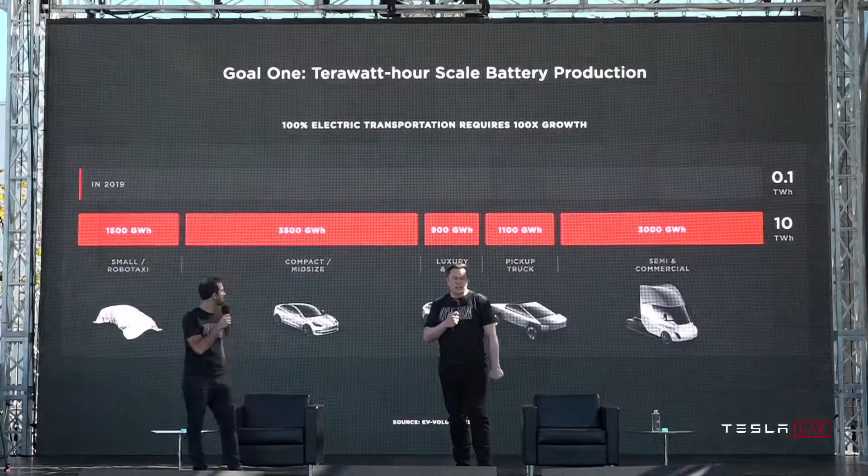Goal number one is terawatt-hour scale battery production. Tera is the new giga, and a terawatt is 1,000 times more than a gigawatt. So we used to talk in terms of gigawatts. In the future, we'll be talking in terms of terawatt hours. This is what's needed in order to transition the world to sustainability.

We're talking about 100x growth in batteries for electric vehicles to achieve this mission. And we are going to get there. It's just a matter of how fast, and our intention is to accelerate it.

You basically need on the order of roughly 10 terawatt hours a year of battery production to transition the global fleet of vehicles to electric. And the average vehicle lasts 15 years, so we're talking about 150 terawatt hours, give or take, to transition all vehicles of all types to electric. So it's a lot of batteries, basically.

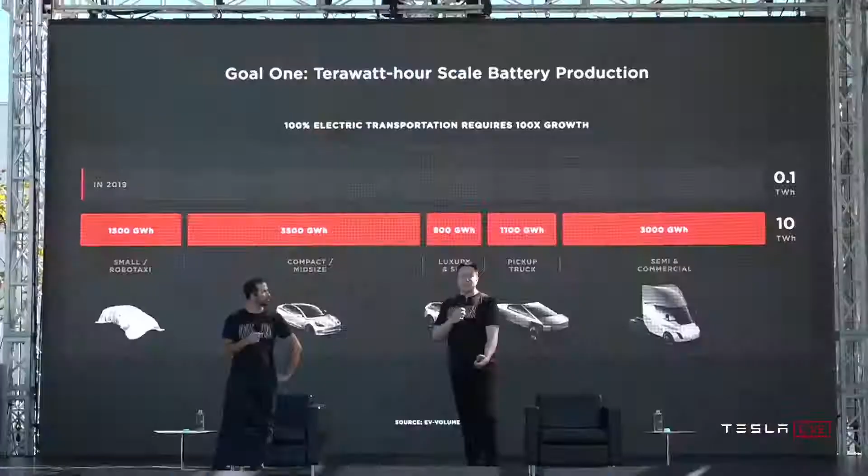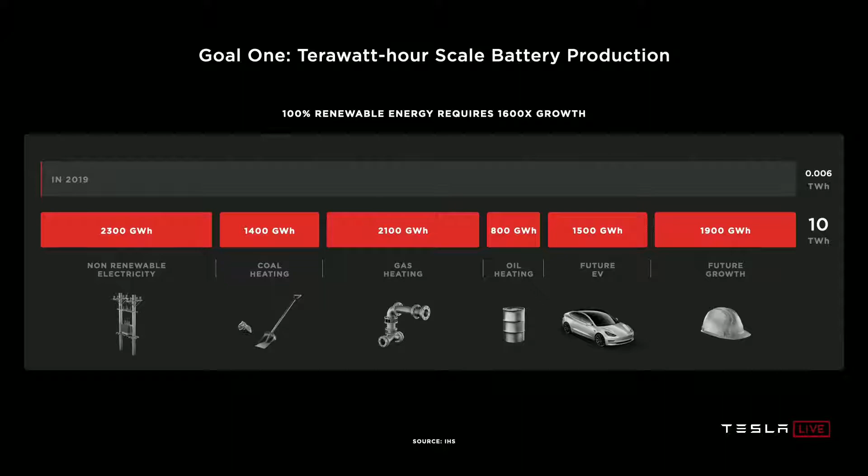And then on the grid side, we have a similar mountain to climb, 1,600 times growth from today's grid batteries to go 100% renewable on the grid and to take all of the existing heating fossil fuel uses in homes and businesses 100% electric.

This number, I think, might grow even more, as the world economy matures and as countries with high populations industrialize, we could see this number be even more. But let's say it's like roughly 20 to 25 terawatt hours per year, sustained for 15 to 25 years to transition the world to renewable. This is a lot.

So today's batteries cannot scale fast enough. They're just too small. For Giga Nevada, 150 gigawatt hours per year is like what we probably expect to make out of there. But this is really pretty small in the grand scheme of things. That's only 0.15 terawatt hours.

And it costs too much. So we would need 135 fully built out Nevada gigafactories to achieve 20 terawatt hours a year. It's not scalable enough of a solution. We need a dramatic rethink of the cell manufacturing system to scale as fast as we can and should.

And I think we should view this as more than just a question of money. Money is sort of like an ethereal thing, but it's really the amount of effort. You have a certain amount of effort, in terms of people and machines, and depending on how efficient that effort is, for a given amount of effort, you want the most amount of batteries. So it's not just a question of, well, if we had $2 trillion, tomorrow you could make this. It's not that easy. You actually need to organize a massive number of people, build a lot of machines, build the machines that make the machines. And so it's incredibly important to have that effort yield the most number of batteries.

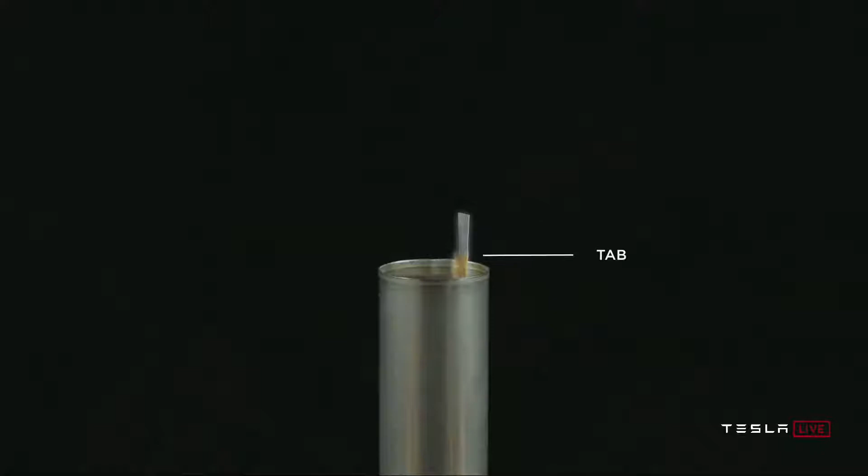So first, before we get too far into it, let's talk about what is in a battery cell. We've got the cap and the can, negative and positive terminals of the cell. When you open that cell, you've got a tab connected to those terminals, what we call the jelly roll, which is the wound electrodes on the inside.

You can actually see what this looks like as you unwind it. This is over 1 meter long in a typical 2170 cell. So it's quite a long winding process. And you can see the tab still there.

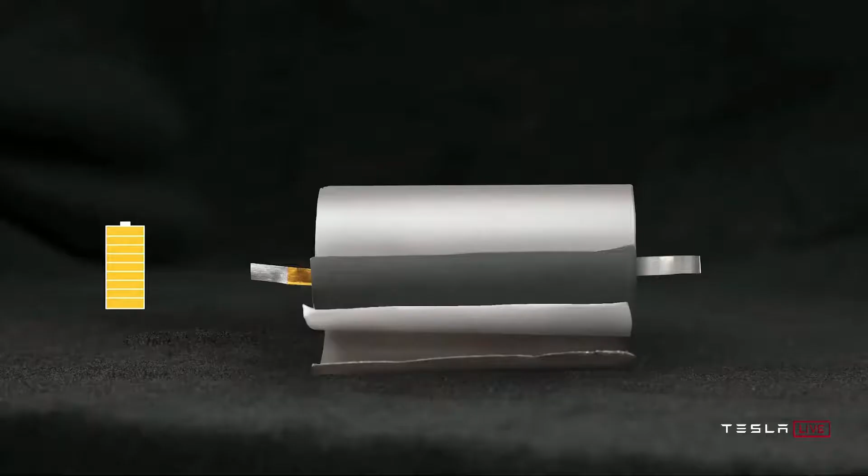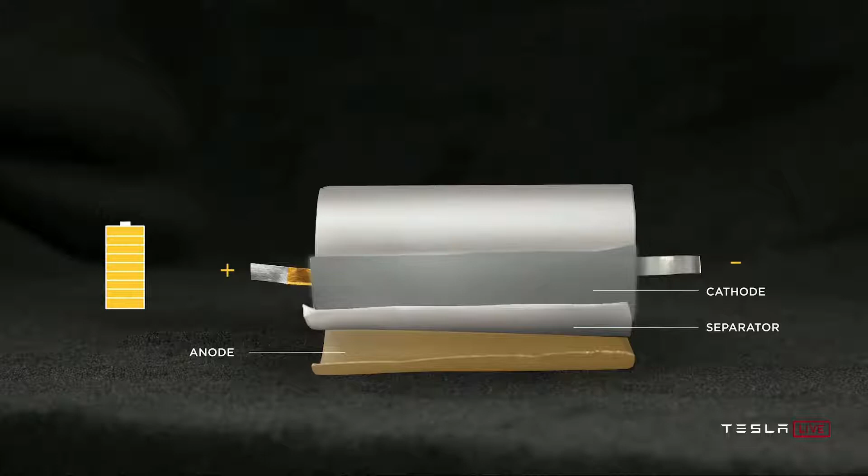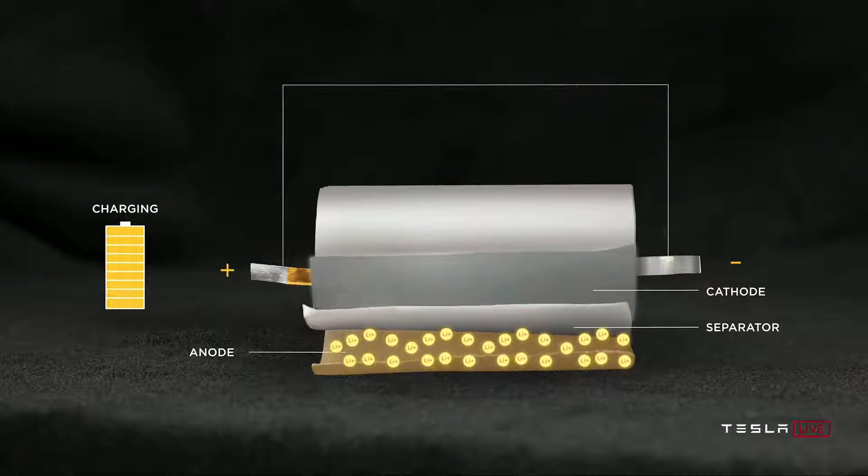To explain what's actually going on here, we've identified the anode, cathode, separator, positive and negative terminal. Watch what happens as we discharge the cell - lithium moving from anode to cathode. And then the reverse, when we charge the cell, lithium moving from cathode to anode across the separator. This is the basic of what makes all lithium-ion batteries, no matter what the form factor is.

And when we look at what's happened to date, at least in our products, we've moved from the 18650 form factor to the 2170 form factor through great collaboration with our partners, Panasonic, new partners like LG and CATL, and probably others in the future.

A slight note on why it's called the 18650, versus the 2170: the first two digits refer to the diameter, and the second two digits refer to the length. That helps explain why these weird numbers. But nobody could explain to me why there was an extra zero. So I said, okay, we're deleting the zero that nobody can explain in future form factors. So technically it's like the 21700, but going forward it's the 2170 because we just got rid of the extra zero since it's pointless.

This was an evolutionary step, going from 18650 to 2170, bringing 50% more energy into the cell. But when we look to the ideal cell design, if we were to do it ourselves, we need to go beyond just what's in front of us, and study the full spectrum of options.

So as you can see, we kind of swept the key figures of merit, how much we can reduce the cost, and how much vehicle range increases as we change the outer diameter of the cell. We found a sweet spot somewhere around 46 millimeters.

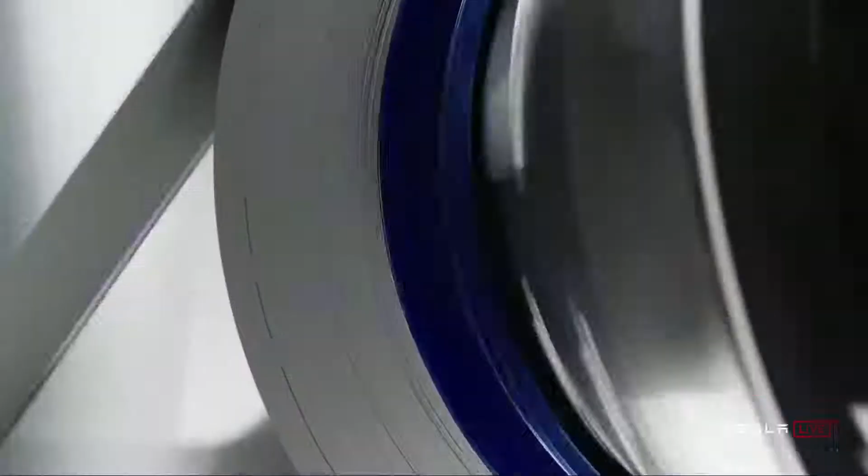I want to stress, this is not just a concept or a rendering. We are starting to ramp up manufacturing of these cells at our pilot 10 gigawatt hour production facility just around the corner. Here's a video of some of what's going on in the plant.

To be clear, it will take about a year to reach the 10 gigawatt hour capacity. This is important to appreciate - when you build a factory, there's a certain capacity that you design to, and then it takes some period of time to actually achieve that capacity. So I'd say it's probably about a year before we get to the 10 gigawatt hour annualized rate with the pilot plant. And this is just a pilot plant - the actual production plants will be more on the order of maybe 200 gigawatt hours, maybe more over time. Thank you.

Let's stack up everything we just saw at the cell level. Just the cell form factor change enables a 14% dollar per kilowatt hour reduction - just that cell form factor change. Now that you've been teased on this factory, we're going to walk step by step through that factory and discuss a series of innovations there.

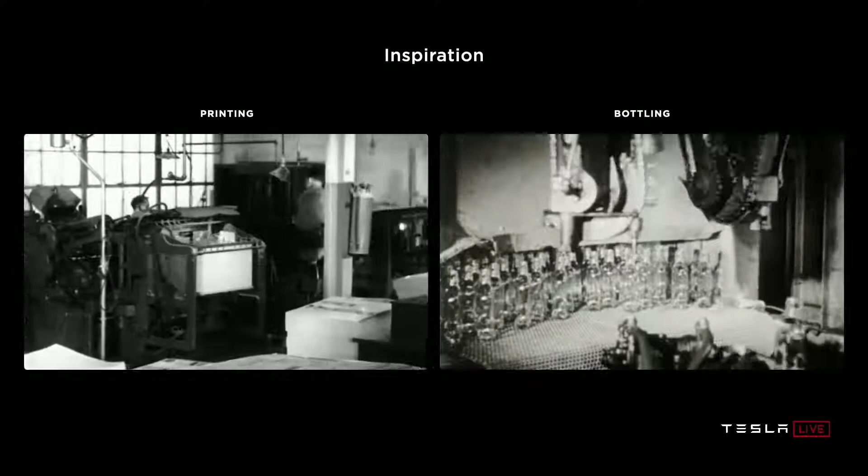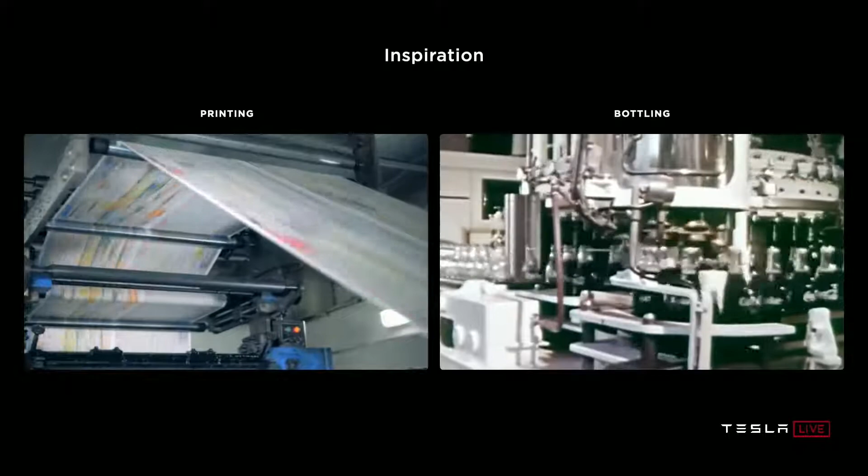When thinking about the ideal cell factory, we have inspirations behind us in the printing and bottling industry, where from humble beginnings, over a century of innovation has enabled mass scale, continuous motion, unbelievably low manufacturing cost. When we think about the lithium-ion industry, which is really only in its 3rd decade of high-volume production, it has so far to go to achieve similar scale and simplicity. That was the inspiration we set out to the team with, as we thought about how to marry cell design and manufacturing in the best possible factory.

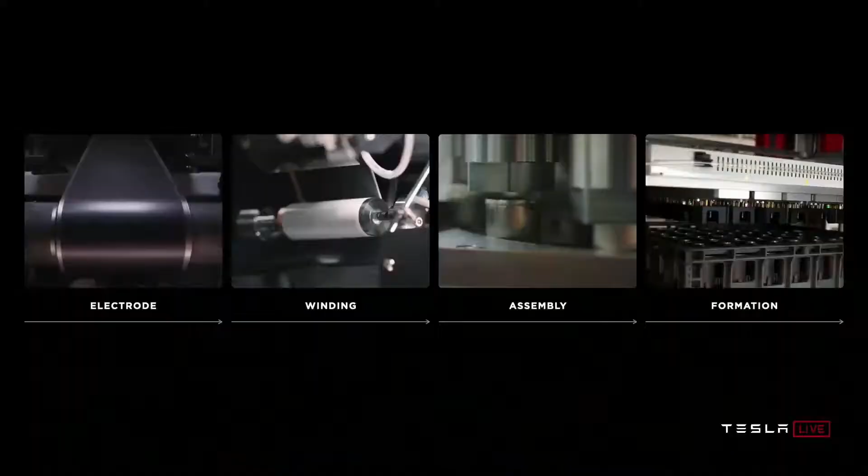Let's talk a little about what's in a cell factory. First, there's an electrode process where the active materials are coated into films onto foils. Then those coated foils are wound in the winding process we just talked about, where if you do have tabs, you have to start and stop a lot. Then the jelly roll is assembled into the can, sealed, filled with electrolyte, and sent to formation, where the cell is charged for the first time, and where the electrochemistry is set and the quality of the cell is verified. We set out at every step of this process to take that inspiration and think about how we make those processes fundamentally better and more scalable.

One of the most important processes is where it all begins - the wet process of electrode coating. Just to give you a sense of scale, I'm going to walk through what's in that wet process. You've got mixing, where the powders are mixed with either water or solvents for the cathode. That mix then goes into a large coat and dry oven, where the slurry is coated onto the foil - huge ovens, tens of meters long.

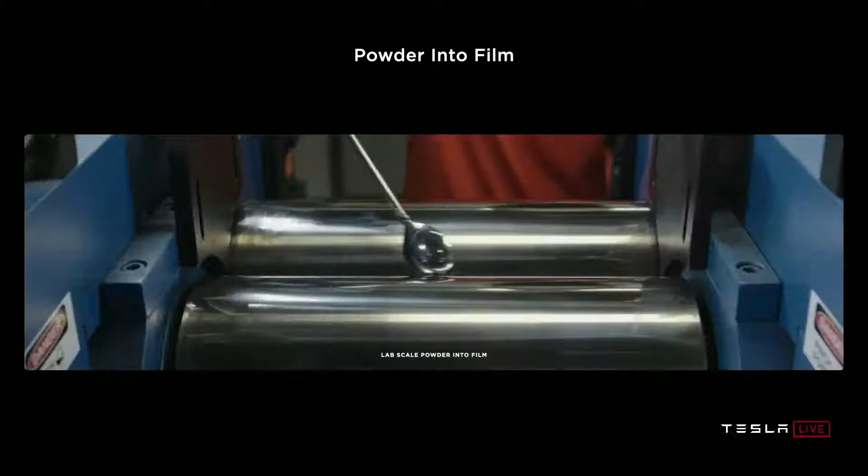And in the most basic form, you can see it here on a benchtop. Literally, powder into film. As simple as that. I mean, it's hard, actually, just to be clear.

So if this was easy, everyone would do it. So it's not like dry coating electrode is actually easy. It's actually very hard to do what appears to be a simple thing. It's insanely difficult to scale up.

But if you do scale it up, what you saw before becomes this. So you can see the motivation: a 10 times reduction in footprint, a 10 times reduction in energy, and a massive reduction in investment. But as Elon was saying, simple is hard.

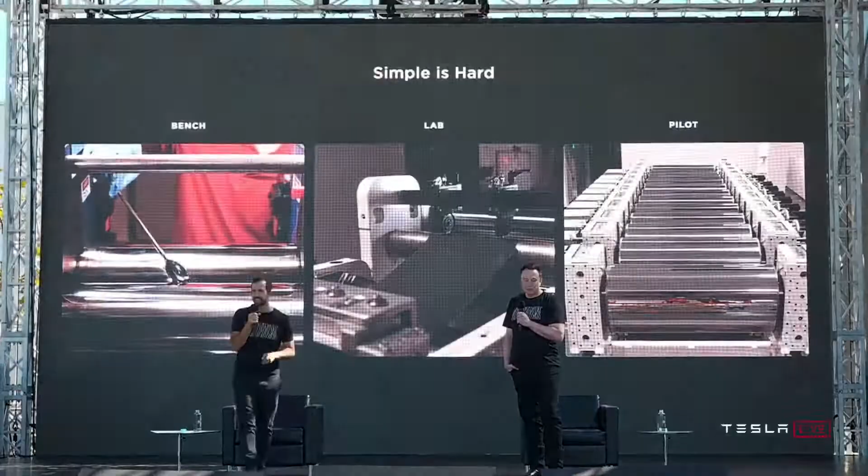Yeah, and beyond the electrode, we continue to innovate on every other process step. So let's talk a little bit about assembly, which is next.

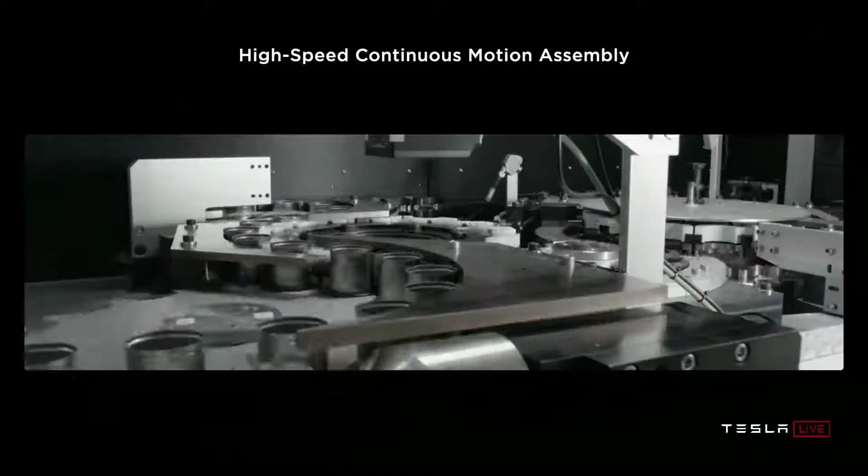The key to a high-performing assembly line is accomplishing processes while in continuous motion, and thinking of the line as a highway: max velocity down the highway, no start and stop, no city driving. Exactly, no stoplights and traffic lights or anything. You want the highway. I want the highway.

And together with our internal design team that makes and designs this equipment, we coupled thinking about how to make the best cell with thinking about how to make the best equipment, so that we could accomplish the fastest parts per minute rates on all of these tools.

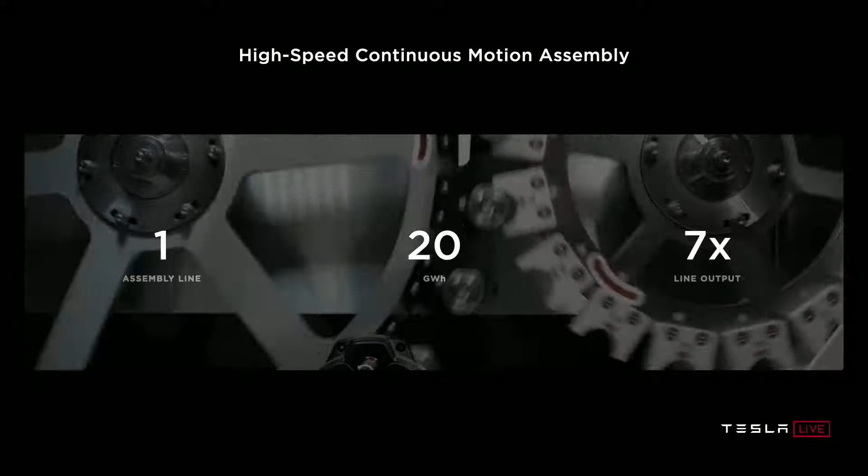And through all of that development, we were able to get to the point where we can implement assembly lines: one line, 20 gigawatt hours, 7 times increase in output per line. And when you're thinking about scalability and pure effort, having one line be 7x the capability is just effort multiplying.

Basically, Tesla is aiming to be the best at manufacturing of any company on Earth. This is the thing that's actually most important in the long run, I think, just from a company standpoint, and from basically achieving sustainability as fast as possible. But I think also for long-term competitiveness, eventually every car company will have long-range electric cars.

Eventually every company will have autonomy, I think, but not every company will be great at manufacturing. Tesla will be absolutely head and shoulders above anyone else in manufacturing. That is our goal. Okay, now let's talk about formation.

In a typical cell factory, formation represents 25% of the investment. And what is formation? It's charging and discharging cells and verifying the quality of the cell. Turns out we've charged and discharged billions and billions of cells in our vehicles, so we know a thing or two about that.

The typical formation setup is you charge and discharge each cell individually. In our car, we charge thousands of cells at once. And we took our principle and our power electronics, leveraging Powerwall, vehicle battery management systems, and others, to dramatically improve the formation equipment cost effectiveness and density.

86% reduction in formation investment, 75% reduction in footprint. You want to take this one? Sure. So essentially, what this translates to, based on what we know today, is about a 75% reduction in the investment per kilowatt hour or gigawatt hour.

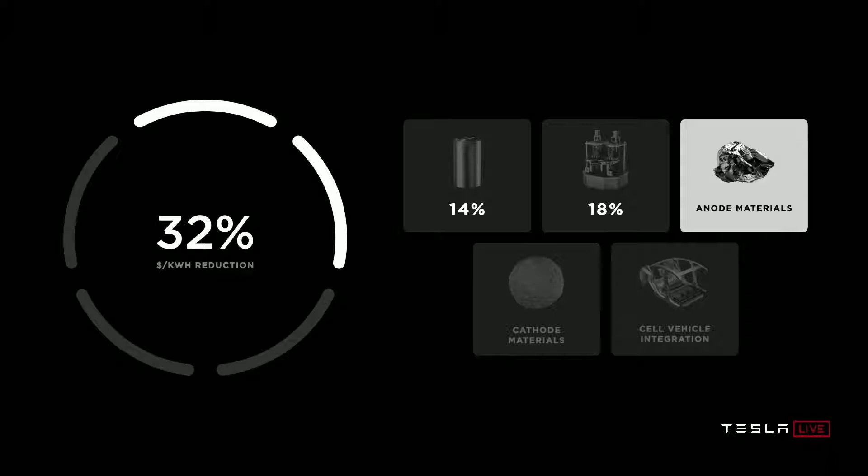But wait, there's more. So we have a manufacturing system, we've got a cell design. What are the active materials we're going to put in that cell design? Let's talk about the anode first.

Let's talk about silicon. Why is silicon awesome? It's awesome because it's the most abundant element in the Earth's crust after oxygen, which means it's everywhere. It's sand. Sand is silicon dioxide. And it happens to store 9 times more lithium than graphite, which is the typical anode material in lithium-ion batteries today. So why isn't everybody using it?

The main reason is because the challenge with silicon is that it expands 4x when fully charged with lithium. And basically, all of that expansion stress on the particles start cracking. They start electrically isolating. You lose capacity. The energy retention of the battery starts to fade. And it also gums up with a passivation layer that has to keep reforming as the particles expand. Basically, with silicon, the cookie crumbles and gets gooey.

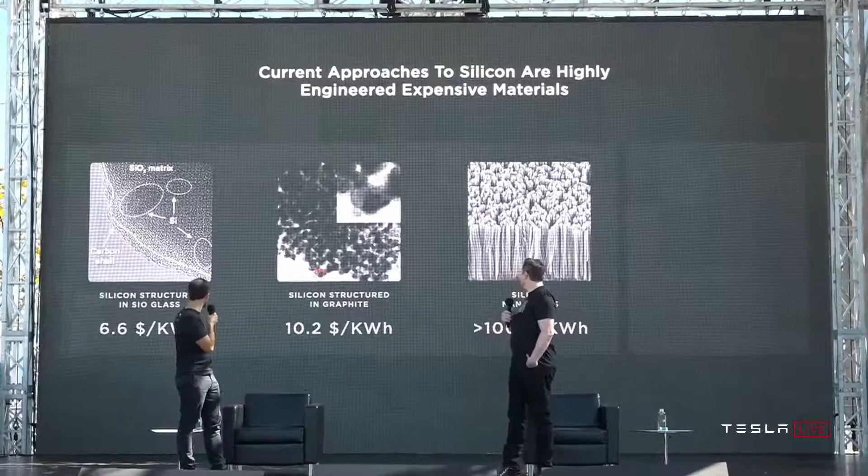And current approaches to solve this, which exist - I mean, we have silicon in the cars that you're all in right now - involve highly engineered, expensive materials in the scheme of things. Now, they're still great, and they enable some of the benefits of silicon. They just don't enable all of it, and they're not scalable enough. And you can see some of the things that maybe you've heard of, SiO, silicon with carbon, or silicon nanowires. That's kind of the space right now.

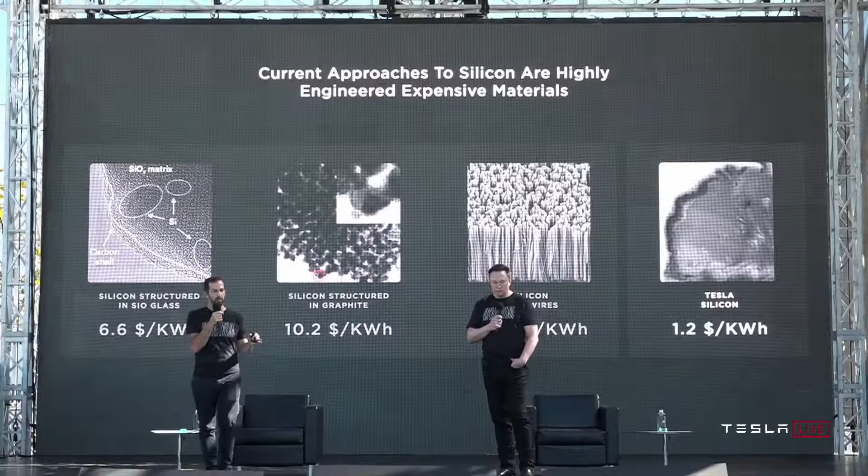What we're proposing is a step change in capability and a step change in cost. And what that really is, is to just go to the raw metallurgical silicon itself. Don't engineer the base metal. Just start with that and design for it to expand in how you think of the particle in the electrode design and how you coat it.

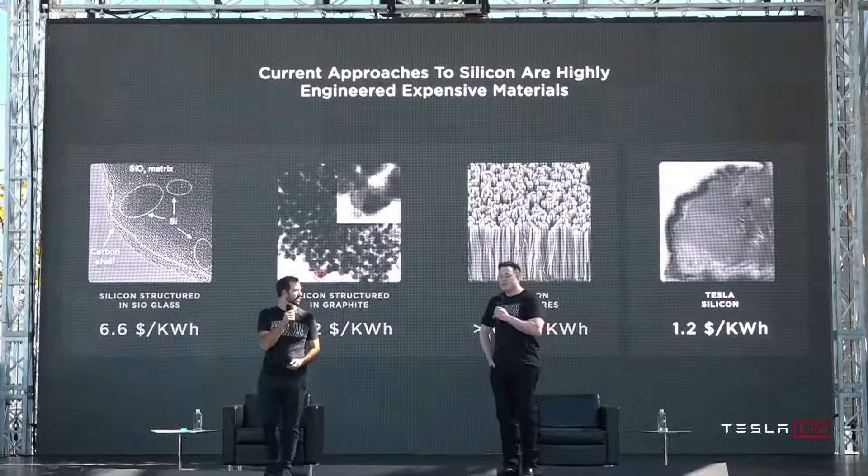And I'm not sure if you saw this - basically $1.20 per kilowatt hour. If you use simple silicon, it's dramatically less than even the silicon that is currently used in the batteries that are made today. And you can use a lot more of it. The anode would cost, with this silicon, $1.20 a kilowatt hour.

And how does it work? Start with raw metallurgical silicon, stabilize the surface with an elastic ion conducting polymer coating that is applied through a very scalable approach - no chemical vapor deposition, no highly engineered high capex solutions - and then integrate it into the electrode through a robust network formed out of a highly elastic binder. And in the end, by leveraging this silicon to its potential, we can increase the range of our vehicles by an additional 20%, just with this improvement.

Yeah, it gets cheaper and longer range. And when we take that anode cost reduction, we're looking at another 5% dollar per kilowatt hour reduction at the battery pack level. And there's more.

Let's talk about cathodes. What is a battery cathode? Cathodes are like bookshelves, where the metal - the nickel, the cobalt, the manganese, or aluminum - is like the shelf, and the lithium is the book. And really, what sets apart these different metals is how many books of lithium they can fit on the shelves and how sturdy the shelves are.

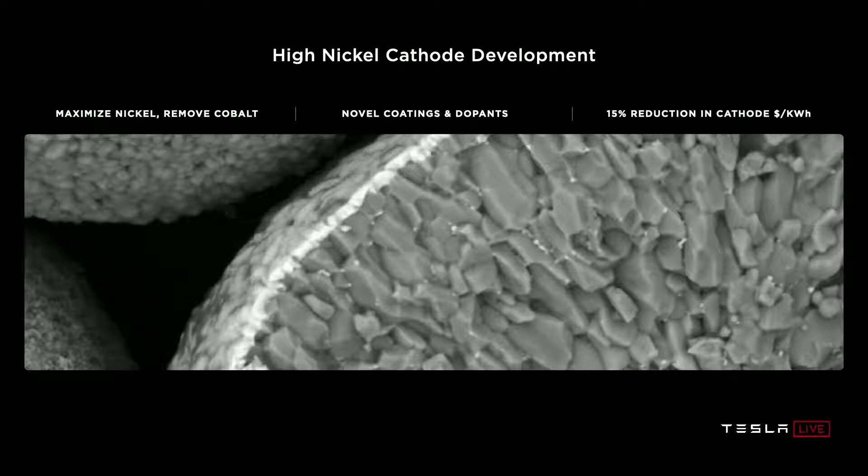But it's not just about nickel. You want to? Yeah, sure.

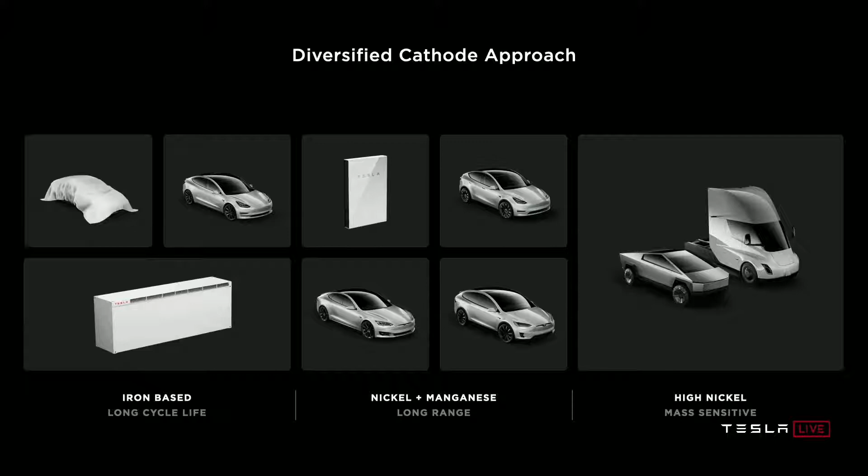So in order to scale, we really need to make sure that we're not constrained by total nickel availability. I actually spoke with the CEOs of the biggest mining companies in the world and said, please make more nickel. It's very important. And so I think they are going to make more nickel.

But there's also, I think we need to have a kind of a 3-tiered approach to batteries. Starting with iron, that's kind of like a medium range, and then nickel manganese as a medium plus intermediate, and then a high nickel for long range applications like Cybertruck and the semi. Something like a semi truck, it's extremely important to have high energy density in order to get long range.

So just to give iron a bit more time - although if you look at the watt-hours per kilogram at the cathode level, iron looks like nickel's twice as good. But when you've fully considered everything at the pack level, nickel is only about 50 or 60% better than iron. So iron is a little better than it would seem when you look at it fully considered at the pack level. It's not as good as nickel - nickel is like 50 to 60% better - but iron is actually pretty good. It's good for stationary storage and for medium range applications where energy density isn't paramount.

And then, like I said, for intermediate it's kind of a nickel manganese approach. It's relatively straightforward to do a cathode that's 2/3 nickel, 1/3 manganese, which would then allow us to make 50% more cell volume with the same amount of nickel, with very little energy trade-off. You'd still want to use 100% nickel for something like a semi-truck, but really not much of a sacrifice at all.

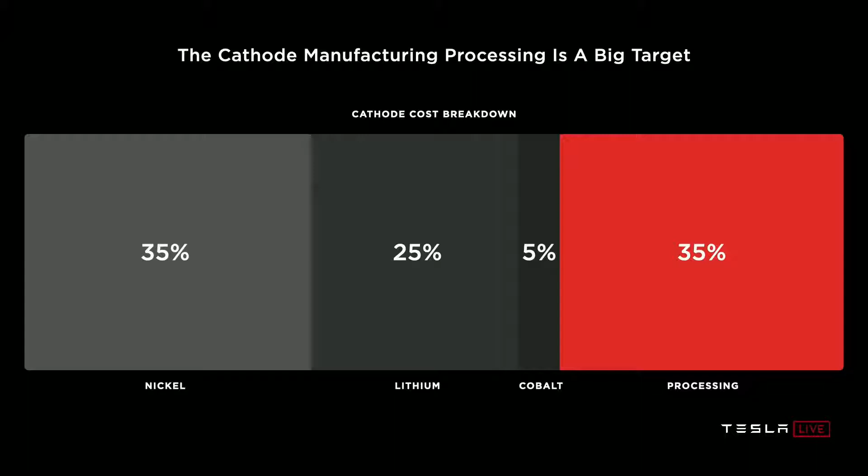Beyond the metals - because a lot of people spend time talking about the metals - actually the cathode process itself is a big target. 35% of the cathode dollar per kilowatt hour is just in transferring it into its final form. So we see that as a big target, and we decided to take that on.

Here's a view of the traditional cathode process. Effectively, if you start at the left, you have the metal from the mine. The first thing that happens is the metal from the mine is changed into an intermediate thing called a metal sulfate, because that's just what chemists wanted a long time ago. Then when you're making the cathode, you have to take this metal sulfate, add chemicals, add a whole bunch of water, a whole bunch of stuff happens in the middle, and at the end you get that little bit of cathode and a whole bunch of wastewater and byproducts.

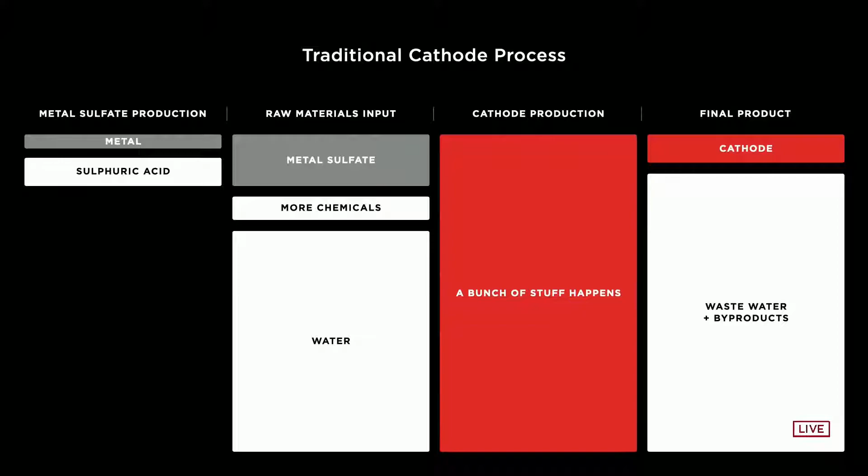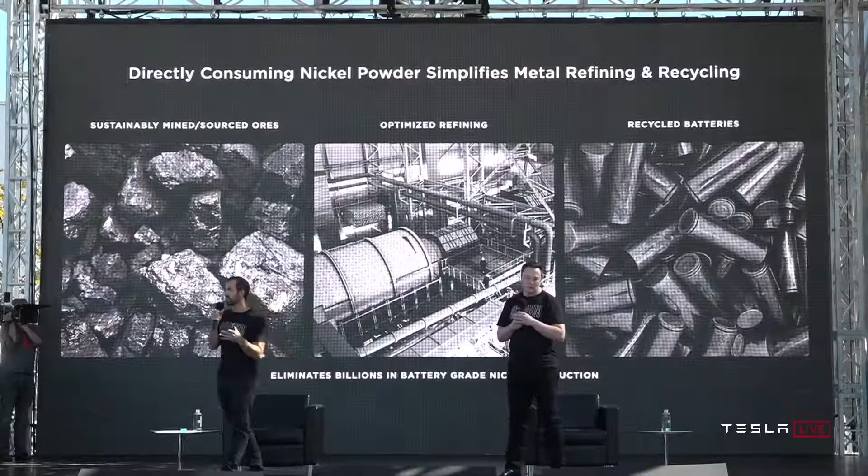And then when you think about the fact that now we're actually just directly consuming the raw metal nickel powder, it dramatically simplifies the metal refining part of the whole process. So we can eliminate billions in battery-grade nickel intermediate production - it's not needed at all. And we can also use that same process to directly consume the metal powder coming out of recycled electric vehicle and grid storage batteries. So this process enables both simpler mining and simpler recycling.

And now that we have this process, obviously we're going to go and start building our own cathode facility in North America, leveraging all of the North American resources that exist for nickel and lithium. And just by localizing our cathode supply chain and production, we can reduce miles traveled by all the materials that end up in the cathode by 80%, which is huge for cost.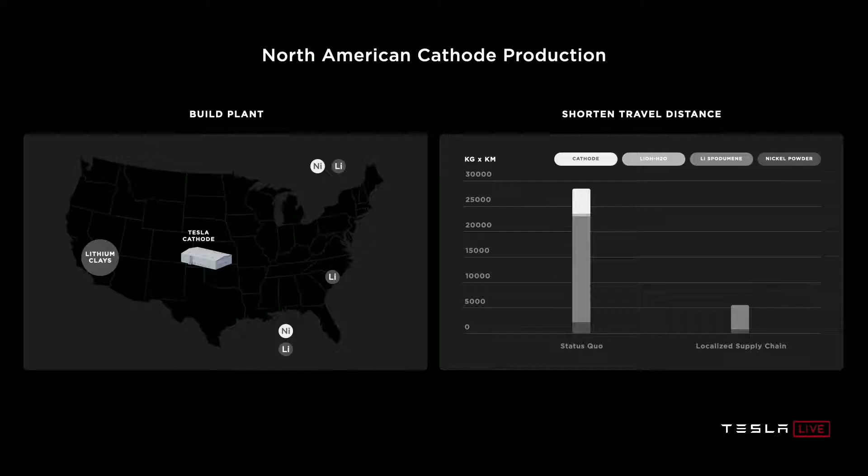And on that note, the way the lithium ends up in the cell is through the cathode, so then we should obviously do on-site lithium conversion as well, which is what we will do using a new process that we're going to pioneer.

That's a sulfate-free process again, skipping the intermediate step: a 33% reduction in lithium cost, with a 100% electric facility co-located with the cathode plant. Simply mix clay with salt, put it in water, and the salt comes out with the lithium. Done.

It's pretty crazy, and we're really excited about this. There's enough lithium in Nevada alone to electrify the entire U.S. fleet. That's basically it - there's so much lithium on Earth. It's crazy, it's one of the most common elements on the planet.

Eventually, as we said at the beginning, when we get to steady state at 20 terawatt hours per year of production, we will transfer the entire non-renewable fleet - power plants, home heating, industrial heating, and vehicles - to electric. At that point we have an awesome resource in those batteries to recycle to make new batteries, so we won't need to do any more mining. The difference in value of material coming back from the vehicle versus from the ground means you'd always choose the vehicle, and we recycle 100% of our vehicle batteries today. We're starting pilot full-scale recycling production at Gigafactory Reno next quarter to continue developing this process as our recycling returns grow.

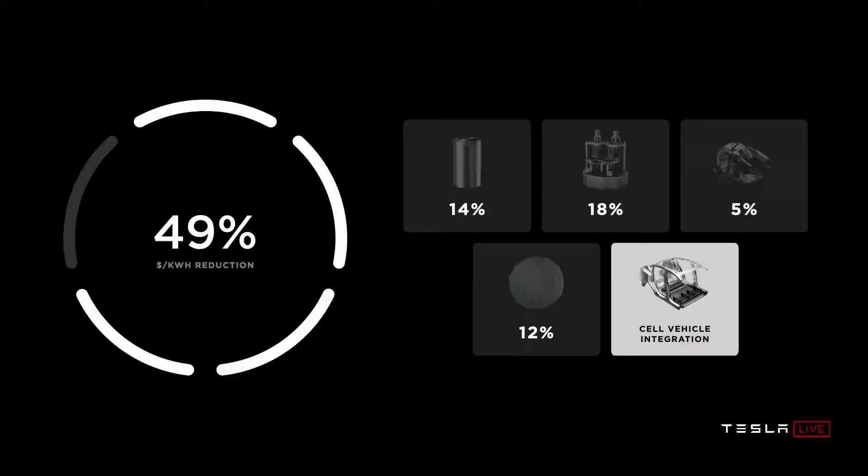Okay, so we just talked about scaling cathode and recycling. All of the benefits you just saw are added to this benefit of a 12% reduction in dollars per kilowatt hour at the battery pack level - almost at our halve-the-cost goal, but there's one more section. Take it away, Elon.

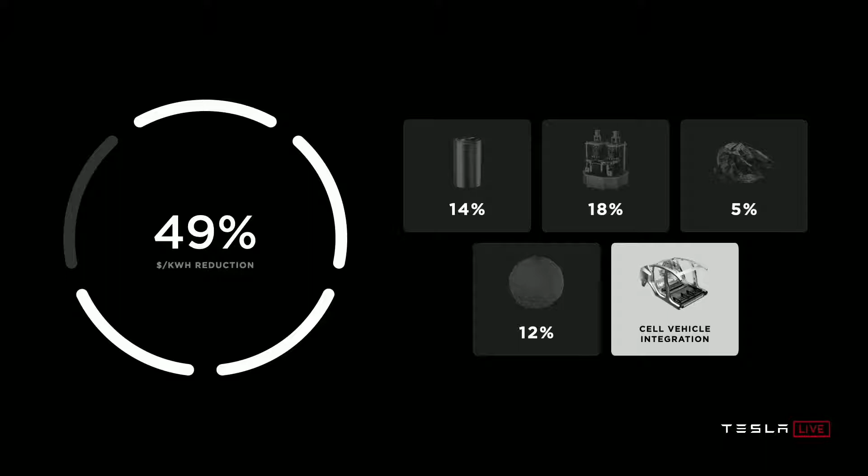There's an architecture we've been wanting to do at Tesla for a long time, and we finally figured it out. I think it's the way all electric cars in the future will ultimately be made - it's the right way to do things.

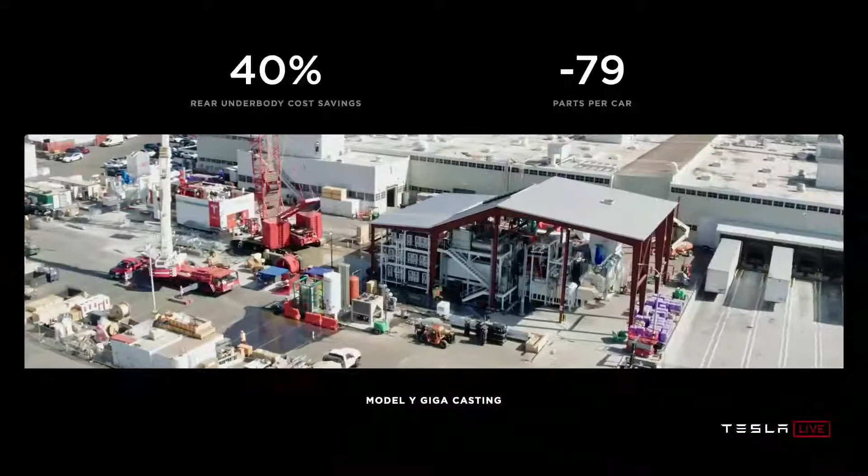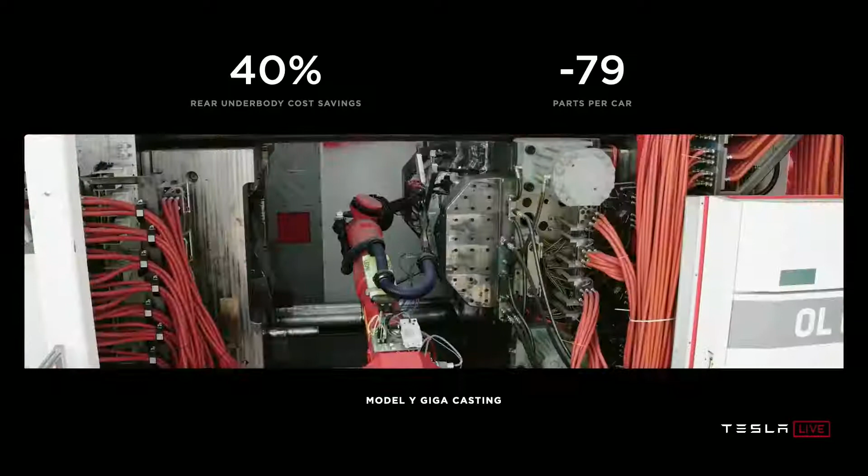It starts with having a single piece casting for the front body and a single piece casting for the rear body. In order to do this, we commissioned the largest casting machine ever made, and it's currently working just over the road at our Fremont plant. It's pretty sweet.

It's currently making the entire rear section of the car as a single piece, high pressure die cast aluminum. To do this we had to develop our own alloy, because we wanted a high strength casting alloy that did not require coatings or heat treatment. This is a big deal for castings, especially large ones - if you heat treat it afterwards it tends to deform, kind of like a potato chip, making it very hard to keep a large casting in shape. There was no alloy that existed that could do this, so we developed our own special alloy of aluminum that has high strength without heat treat and is very castable. That's a great achievement of our materials team.

In fact, we've got a lot of advanced materials coming for Tesla - new alloys and materials that have never existed before. So we're basically making the front and rear of the car as a single piece, and then that...

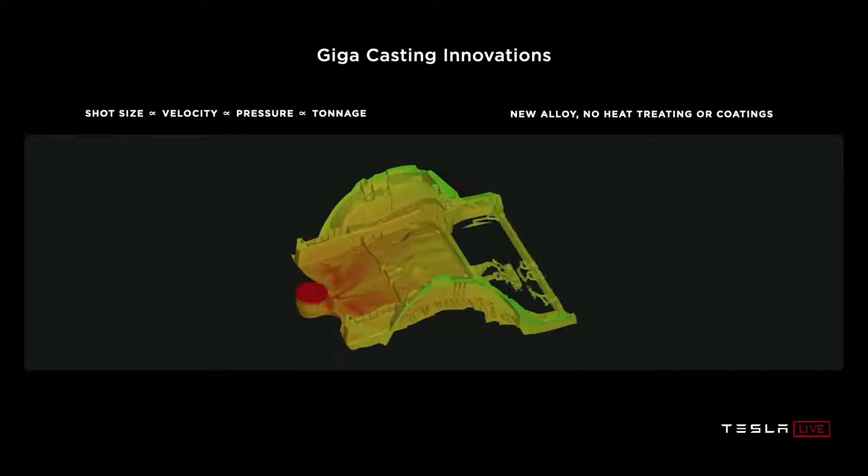...interfaces to what we call the structural battery, where the battery for the first time will have dual use - both as an energy device and as structure. This is absolutely the way things are done.

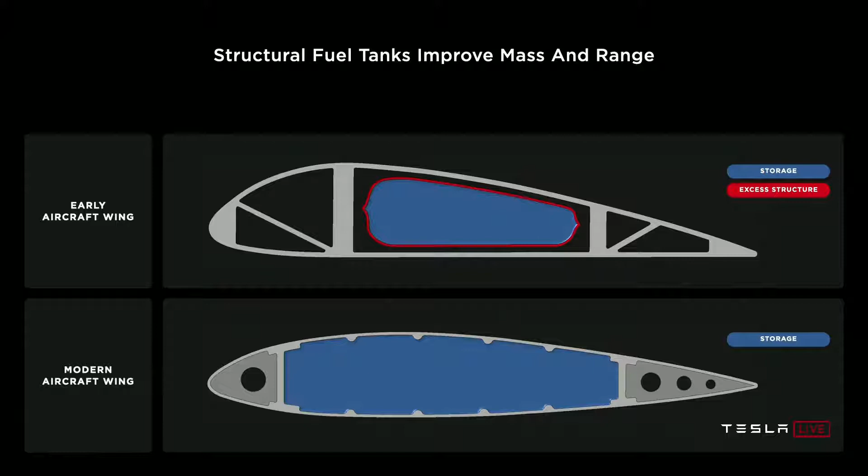In the early days of aircraft, they would carry fuel tanks as cargo, and those fuel tanks were actually quite difficult to carry - basically worse than cargo, you had to bolt them down. It was very difficult. Then somebody said, 'what if we just make the wing tanks - what if we make the fuel tank in wing shape?' So in all modern airplanes, the wing is just a fuel tank in wing shape. This is absolutely the way to do it. The fuel tank then serves as dual structure and is no longer cargo - it's fundamental to the structure of the aircraft. This was a major breakthrough, and we're doing the same for cars.

So, this is really quite profound. Effectively, the non-cell portion of the battery has negative mass.

We save more mass in the rest of the vehicle than the non-cell portion of the battery. So how do you really minimize the mass of a battery? Make the non-cell portion of the battery pack negative.

It also allows us to pack the cells more densely because we don't have intermediate structure in the battery pack. Instead of having supports, stabilizers, stringers and structural elements in the battery, we now have a lot more space because the pack itself is structural.

So it improves the mass efficiency of the battery, and the castings are also quite important because you want to transfer load into the structural battery pack in a smooth, continuous way, so you don't put arbitrary point loads into the battery. You have to feather the load out from the front and rear into the structural battery.

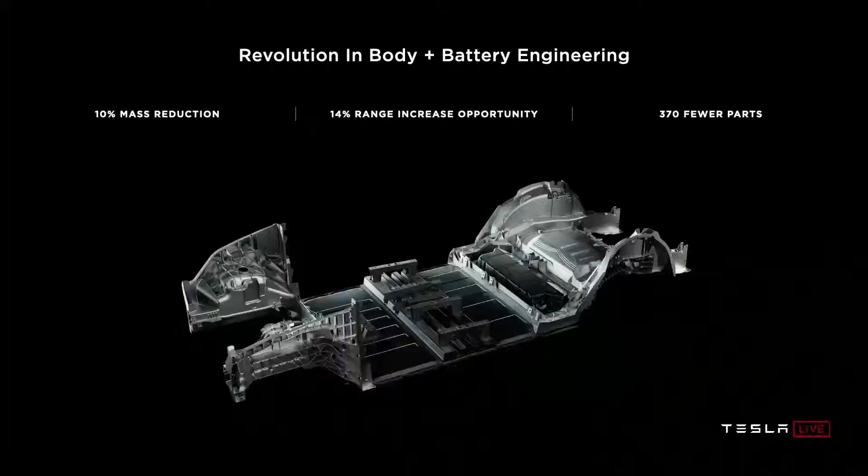So, 10% mass reduction in the body of the car, 14% range increase, 370 fewer parts.

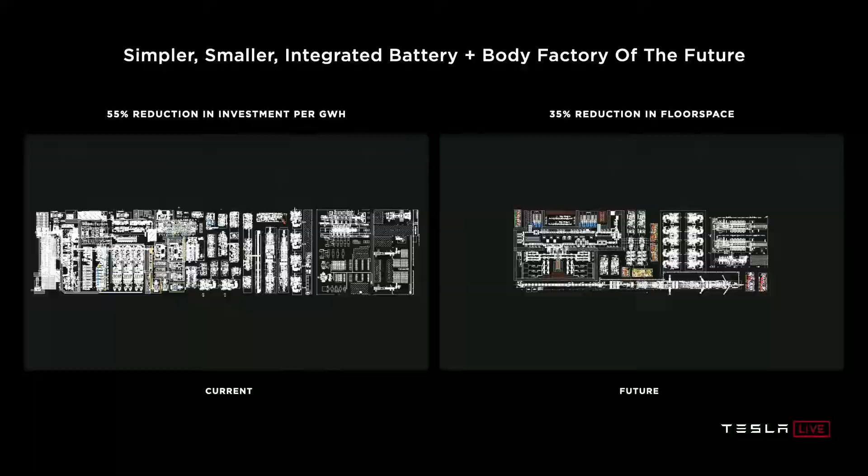I really think that long term, any cars that do not take this architecture will not be competitive. And it's not just a better product — in the factory, it's a massive simplification.

You saw the part removal — casting machines, the structural battery pack. We're looking at over 50% reduction in investment per gigawatt hour, 35% reduction in floor space, and we'll continue to improve that as we make the vehicle factory of the future.

So it's major improvements on all fronts, from the cell all the way to the vehicle. In addition to enabling additional range and improving structural performance, it's worth another 7% dollar per kilowatt hour reduction at the battery pack level, bringing our total reductions now to 56% dollars per kilowatt hour.

All right, so stacking it up, we're not just talking about cost or range — we've got to look at all the facets. Range increase: we're unlocking up to 54% increase in range for our vehicles and energy density for our energy products.

56% reduction in dollars per kilowatt hour at the battery pack level, and a 69% reduction in investment per gigawatt hour, which is the true enabler when we talk about how we achieve this scale problem.

So what this enables us to do is achieve a new trajectory in the reduction of cell cost. To be clear, it will take us probably a year to 18 months to start realizing these advantages, and probably about 3 years or thereabouts to fully realize them.